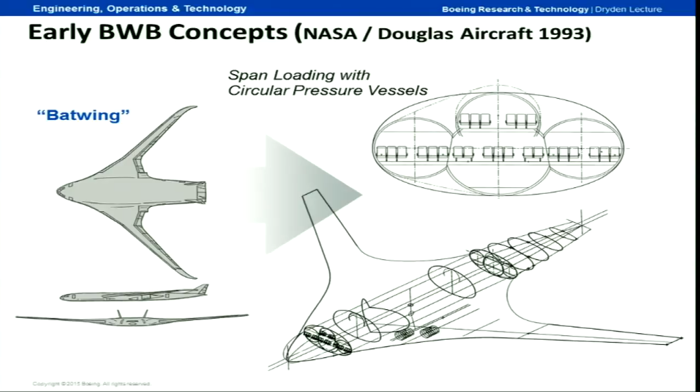So that was bad idea number one. So we moved on. Next slide please. And this is a cartoon that dates way back. We have the configuration of a typical double-deck subsonic transport. And the early concept of the BWB, where you see the one on the left has got the circular sections that'll take the loads very nicely.

The one on the right has, in essence, a flat-sided pressure vessel. And in that case, you have to take the loads in bending. Every flight, you go to the ultimate load, the design load. It also shows that fuselages don't carry lift real well. You see the dimple. The blue is lift, and the red is weight or mass. And you want those equal. And so a fuselage doesn't carry that load very well.

The other thing on the blended wing, notice that the weight is distributed uniformly across most of the span. Those two big spikes outboard of the center body, we call it the armpit of the wing, but there's a lot of fuel volume there and it enables the BWB to be a good tanker. And notice also that we carry the load all the way out to the tip and up the winglet.

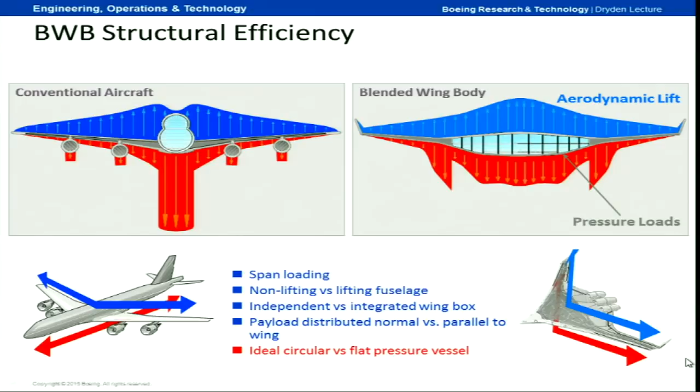The other thing about this figure is, on a conventional airplane, you've got two big things at 90 degrees to one another, and you've got to pass all the loads through those. Whereas on a blended wing, you're lined up. So it's a very simple structure. And it's just a big wing, in essence. And this has enabled a lot of the performance gains that we've been able to show.

Okay, now this is 2001, and this airplane was an early, well, at the time we thought it was the latest thing, but we worked real hard on this one. The 450 stands for 450 passengers, and we did a lot of analysis on design of it and the structure. So we chose it to use for the X-48.

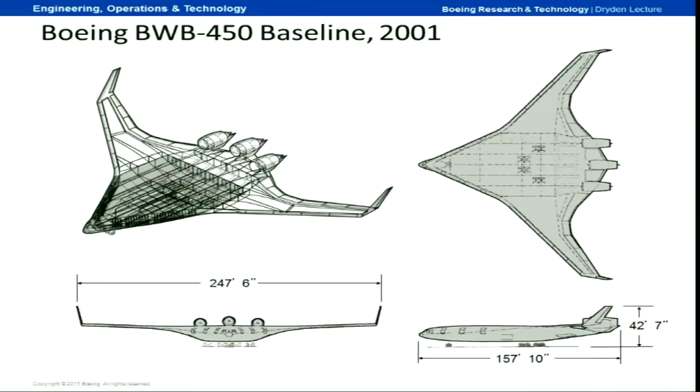Now I'll go to the next slide. Oh, got to compare with the other guy's airplane. There is an A380 and a BWB of the same passenger capacity. I suggest painting Goodyear on the side of the A380.

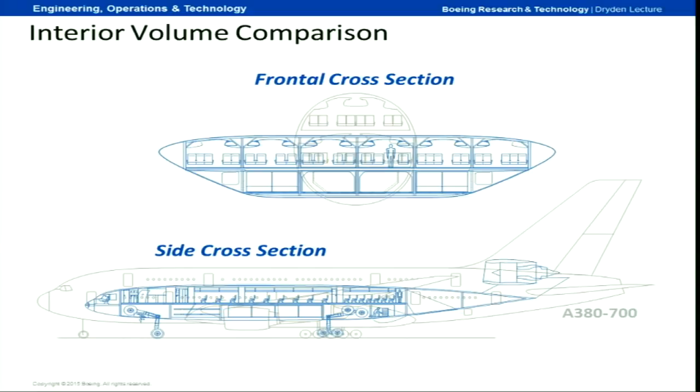Next slide. So what are the real challenges? First of all, a BWB is a nonlinear airplane design. By nonlinear, you poke on it anywhere and stuff changes everywhere, it seems. A tube and wing airplane, which I use in my airplane design classes at both MIT and UCI, is simple. The fuselage has one design parameter, its diameter. The wing has two, sweep and aspect ratio.

And then somebody like Norm Princen puts a big tail on it. So I'll move down to the next thing, which is robust flight mechanics of a tailless airplane. There are a lot of tailless airplanes around, but still, we wanted it to fly just as well as a C-17 or an A330 or whatever.

Okay, and those airplanes have some funny traits. Tailless airplanes, often if they stall, they'll depart in a pitch tumble, either direction. And you probably don't want to schedule meal service then.

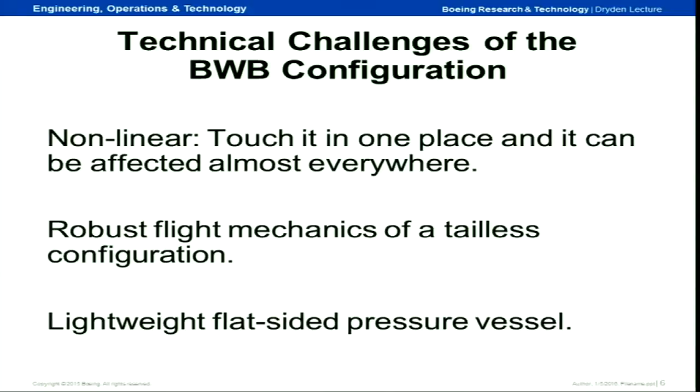Next. And here we have, hey, the B-2 exists. They don't stall the B-2. It stops way short of CL max. And, well, you don't have to make money with a B-2, so you can carry around the extra wing for margin, and it's not that big a deal.

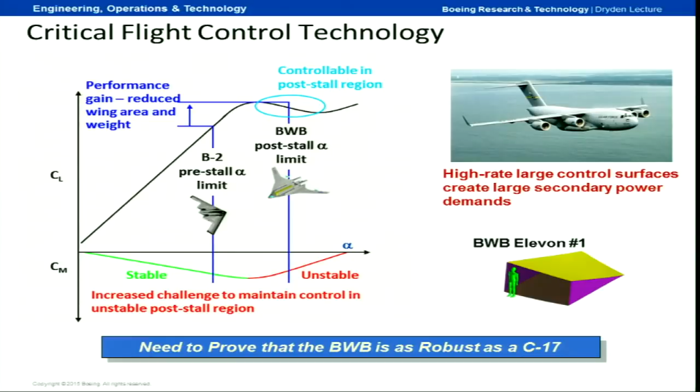But we wanted the BWB to be able to sail over the top of CL max there and still act like a normal airplane. The other thing that goes on, you see in the lower right, one of the inboard elevons—they're the size of your bedroom. And with the case of a tailless airplane, the bandwidth of the control surfaces is pretty high, 80 degrees a second. So you're waving a bedroom floor at that rate. That's a challenge.

All right, the figure on the left is in the NASA spin tunnel. Note that the airflow in this tunnel is vertical, and they throw the model out a window, literally, and see if it spins or not. The XB-35 spun. That's a BWB on the right, and it spun. Uh-oh.

And I was talking with the late Duane McRuer and Irv Ashkenas—you flight mechanicers have probably heard of them. Duane said that the inertias were wrong on the models, and that's why they spun, or pitch tumbled, or both. And what about the inertias? What are the two sources of a force on an airplane? Aerodynamics and inertia.

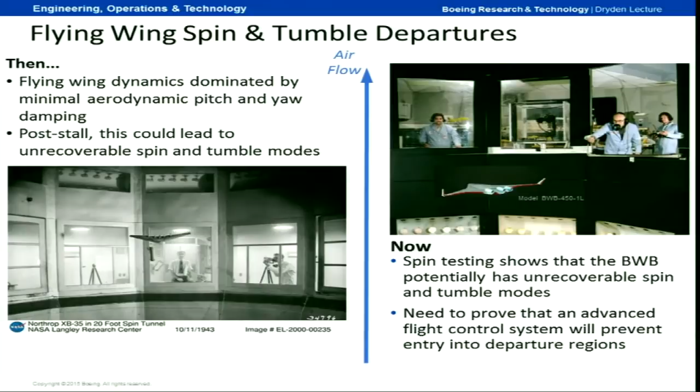And when we were doing an 8.5% scale model, the X-48, it turns out the inertia scales with the fifth power of the length scale. So now if you say that, to build this—there's the airplane, 21-foot span, 500 pounds, but it's still a big airplane. But to meet the inertias of the full-size one, we almost had to build the outer wings out of Kleenex. So it was a real challenge to get the inertias close, to have a dynamically scaled airplane.

And the other thing is, the entire airplane was fabricated at Cranfield Aerospace in the UK, and did a lot of commuting on the 5:30 British Airways flight to London. But they did an exceptional job of building the airplane—built two of them.

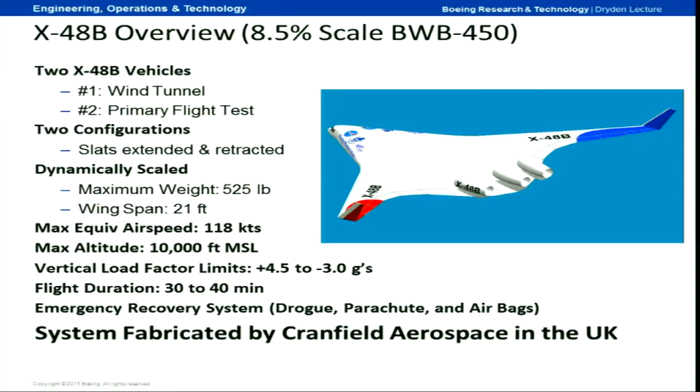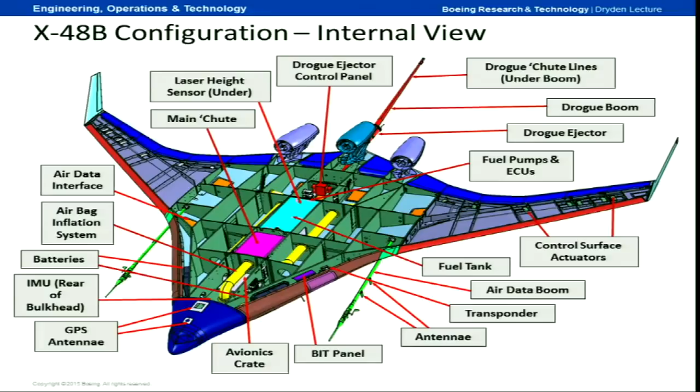Next slide. Another feature with working with NASA—and I'll say it probably more than once—this project was 50-50, Boeing and NASA, totally. Technically we each paid our own way, in essence, but NASA was right in there solving the problems alongside of ourselves.

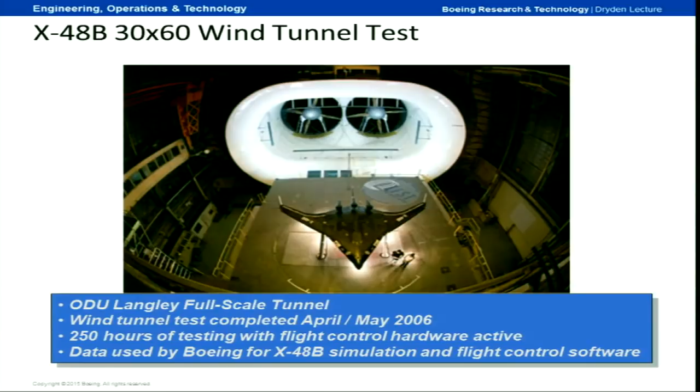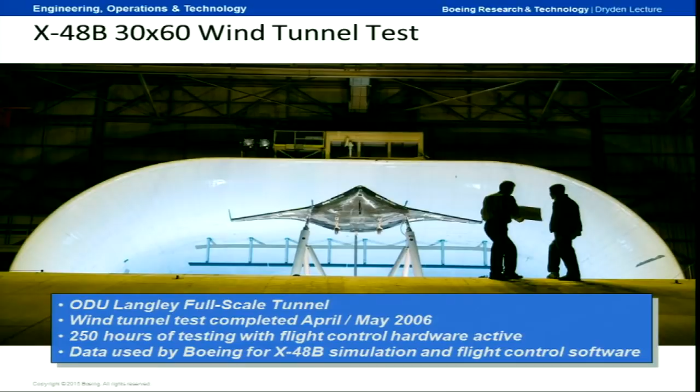Here we are in the 30 by 60 tunnel. That's the full airplane, the X-48. And we were able to go in there and measure stability derivatives in hinge moments, which CFD isn't able to do—right, John? And also calibrate the air data system. To be able to go in a wind tunnel with, in essence, your full-scale airplane was special. There are 250 hours, and we knew everything we needed to know about the airplane.

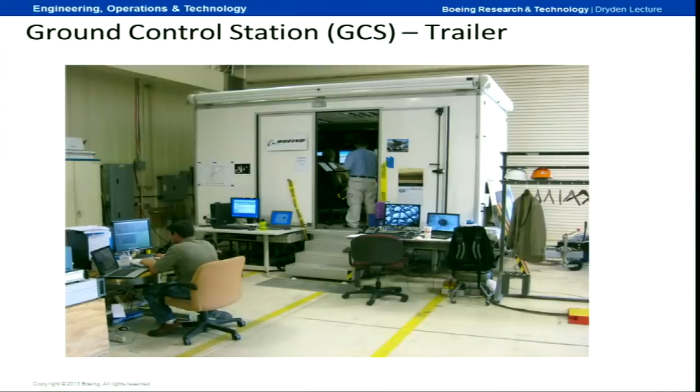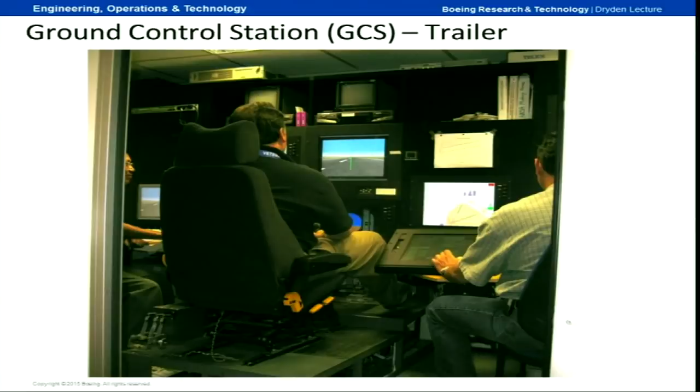$3,500 a piece. Well, it isn't free. It is if you're going out to buy jet engines.

Notice those probes on the front - those are air data probes. They're just pitot-static and alpha and beta vanes.

Out the back is a boom, and that's so if we do abort the flight, we've got a drogue chute, and we don't want it to entangle. So the drogue chute comes out of the back, and the airplane - we had a complex system, I won't go into it, to try and save the airplane on abort. When that drogue chute comes out, the airplane winds up going straight down at 90 knots.

And then we had a parachute that comes out of the top and so on. We never had to do that. But this is 2007.

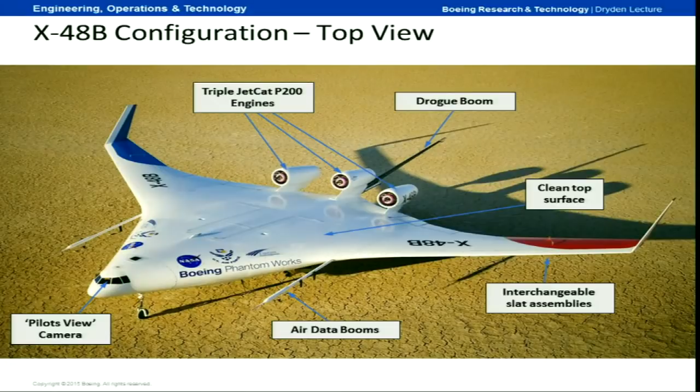The picture without the logos was in Time magazine as the second best invention of 2007. Anybody know the first? Nope. So we were second. Oh well, okay, next slide.

Here's the first flight.

Skyway 48, Skyway 48, over, sir. 48 in position, Lake Bed runway 23, request clearance for takeoff. Skyway 48, roger, main base wind calm, cleared for takeoff.

We're in a pickup truck next to it, and Norm Princen is holding the video camera out the window.

This is NASA video now. Skyway 48, airborne.

The practice, I'll do a left turn for area orientation, but the real one will be right. There should be no trouble at all. And for card Lima 6, we are at high key. Skyway 48, practice high key.

Throttle on. T-34 throttle on. Speed and power's coming, chase back. Verify tape mismatch. Yes. Check control. Control is correct. Throttle off. Throttle disengage with the throttle button. Full doublet when able. Doublet in 3, 2, 1, doublet and roll, complete. Doublet when able, doublet in 3, 2.

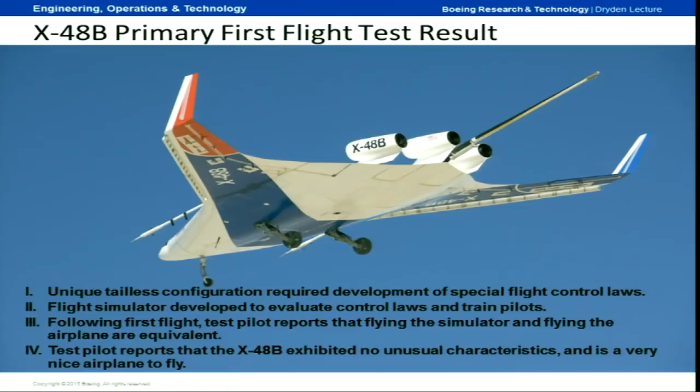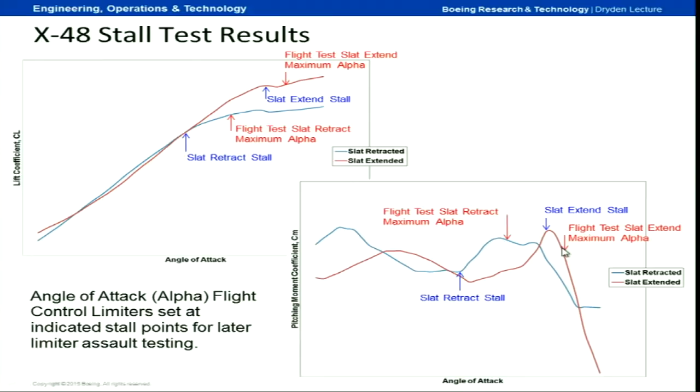But this is how we set the limiter values that you'll get to see exercised. Next.

Okay, these flights, the pilot just slams the rudder.

Recover? And recovering. 17.05 max.

Okay, good point. Let's do 4 Bravo in opposite direction. Okay, slight right turn and then a left rudder. And stable, you're clear, rudder on 3.

Recovering. 17.49 max. There will be a left rudder step. Stabilizing. Bank.

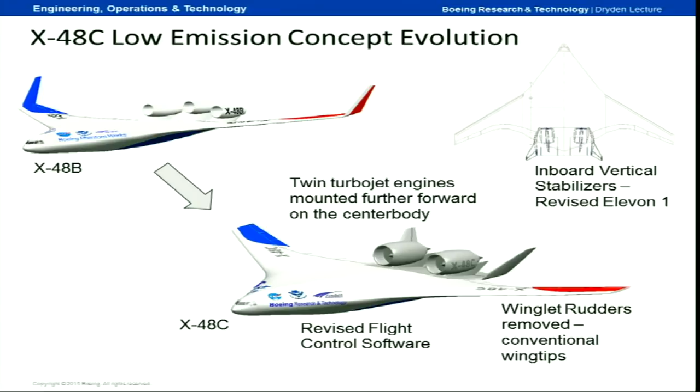Next, we looked at making a quieter airplane. I've been dragged kicking and screaming into this one because I like the verticals on the wingtips. But at any rate, there it is, and it's the direction we're headed now. And we went to 2 bigger engines, or higher thrust engines, and this is called the X-48C. And it's got Norm Princen's signature on it. The tails are bigger. Okay, next.

We tested it also in the 30 by 60 tunnel. And incidentally, this was the last time the 30 by 60 tunnel was used. I threatened to pull a Tiananmen Square thing in front of the bulldozer that tore down the tunnel, and Faye said, please don't. But we went over, again, all the stuff for the X-48C, and then another test using another model in the Langley 12-foot to get a A to B comparison of the rudder effectiveness primarily of the B versus the C. And they were damn close.

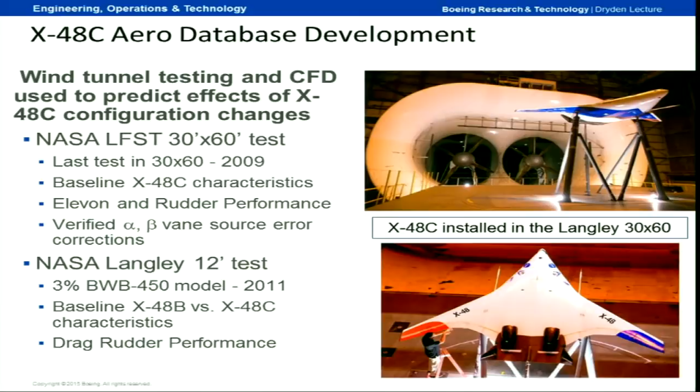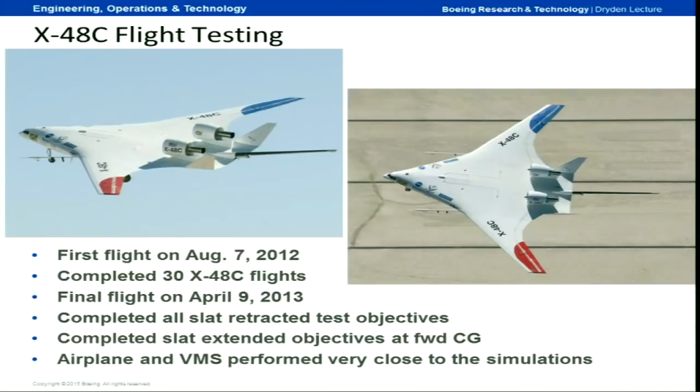Okay, back to the winglet rudders. No. There is the X-48C in flight, and its last flight was on April 9th in 2013. And we got all of the data we wanted out of it. Okay, next. So where were we?

We had a total of 122 flights for the whole project, single string. I think that was a record at Armstrong. And so what's happening now? Well, the X-48C is in the museum at the Air Force Museum at Edwards. And the X-48, the other one is packed up, but they're ready to fly again. I was just talking to Israel Wygnanski at lunch today about some control effectors that we could test on the X-48C. Norman is pretty excited about that. So we haven't given up. Those airplanes are still flyable. Next.

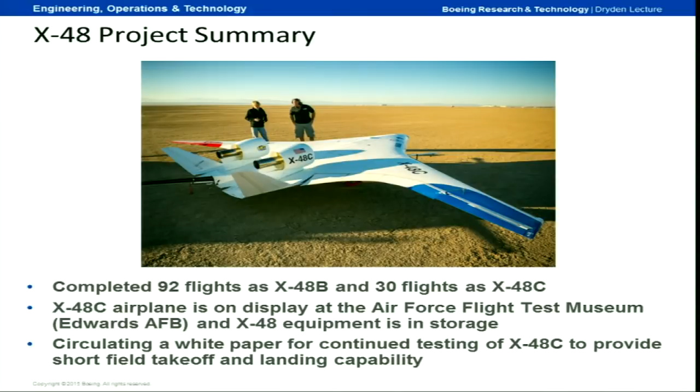This is the other problem. This is the structures problem. And if you look, there's a BWB. Well, again, this is our flat-sided pressure vessel. And normally, the skin of an airplane just takes NX and NY. But if you're pressurizing it, you have NZ load. So we needed a structural concept to do this.

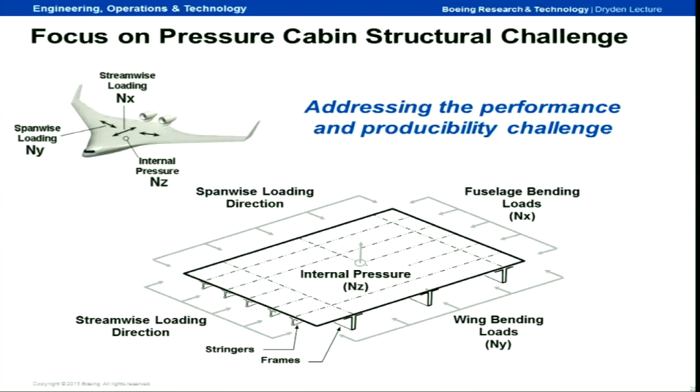Next. There it is. Pultruded rod, stitched, efficient, unitized structure, PRSEUS.

This is the brainchild of Alex Velicki. To me, it's just a tooling concept, but...

It's a dry preform, and it's stitched, and then a bag is thrown over the top of it and resin is drawn in. But when you stitch it, as opposed to pre-preg, where you've got just layers of pre-preg tape, this is way more isotropic. And this is an ingenious way of tooling.

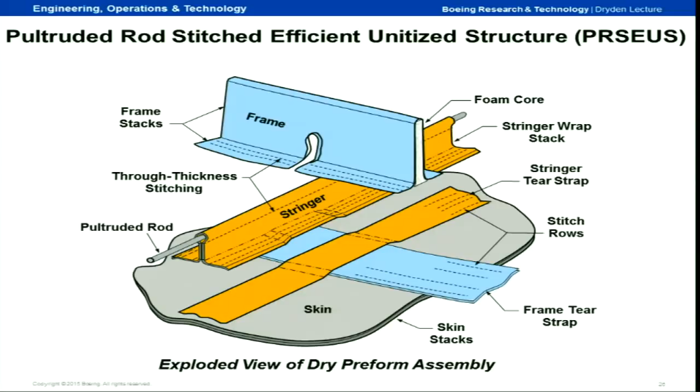And the next slide shows what happens when you do that. That's one piece. There are no rivets, there are no brackets, nothing's bolted together.

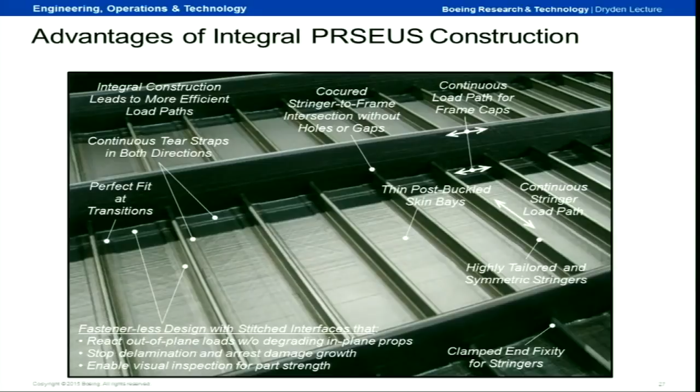It's one monolithic piece. And so we built a center box. Next slide, there it is. We wanted to build a full scale, but the COLTS test facility at Langley would only hold 80% scale. And you see where it comes out of the BWB. And that was an impressive structure. There's some cutaway on that.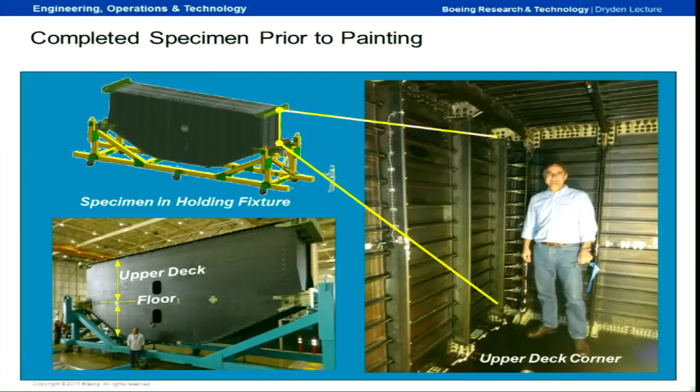So what are we going to do with it? Next. It wouldn't fit in the C-17, so we used the Guppy. And there it is. Not that long ago, the Guppy flew back to Langley, December last year. There it is, departing Long Beach.

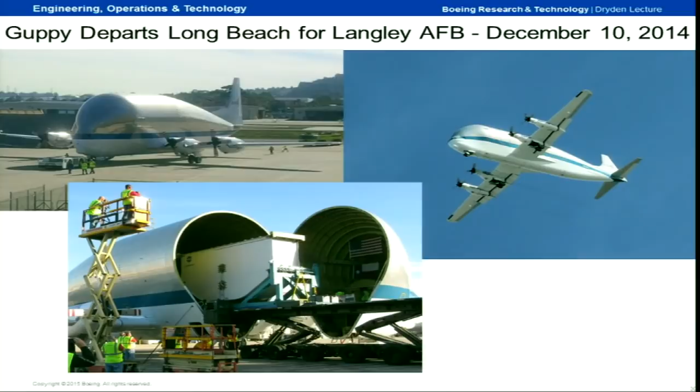This COLTS thing is the meanest thing to torture a structure that you could imagine. Basically, it grabs each end of that center box and loads it with aerodynamic loads, the maximum aerodynamic loads. And in addition, it's pressurized. What we had was the critical design conditions: 2.5 Gs plus 1 pressure. But we tested way beyond that.

I'm sorry, let's go back to that. At the design, those are the design values. It didn't break. And we even went to the ultimate load and didn't break.

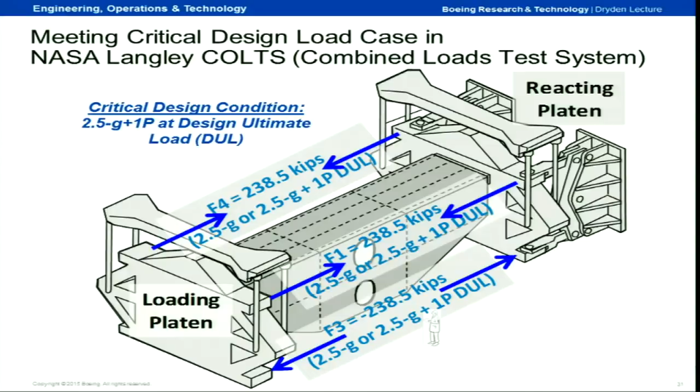So, next slide, we went and hit it with a hammer. And then in the lower right corner, that's a 2-foot long slice, 1 inch wide, trying to hurt the thing. Well, the only thing it wouldn't do was hold pressure.

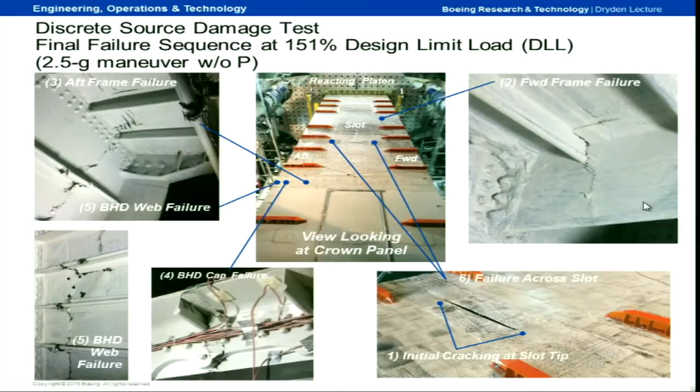But when we loaded it up, the next slide I think has a summary of it. There, we had the 5 load cases where, incidentally, on these 2.5 G things, we put twice the pressure load on it. And those 5 top test cases, the thing was happy.

Enter the Sawzall, and we cut frames, still in the test fixture. A requirement, FAA, FAR, is that with damaged structure you get to 70% of design limit load. With the broken structure, it went to 151% of design limit load. And it acted like metal, because with metal structures we still use the 2-bay crack rule and all that. The thing acted like metal.

Here's the big answer: minimum gauge. The skin on that thing is 52 thousandths, that's a little less than a 16th of an inch. That's the skin, and we can use that everywhere. So not only did it not break and exceed the numbers, it's light.

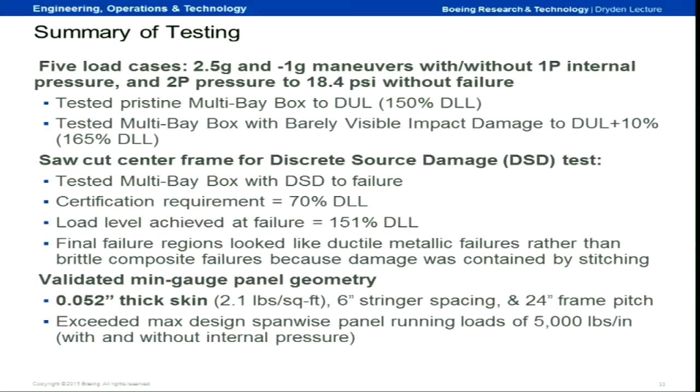So, next slide. Another thing going on that was just presented here, the ERA thing. This is a different airplane, the more modern BWB. There are several talks on it going on now. It was tested with flow-through nacelles, ejector-powered nacelles, and turbine power simulators, TPSs. We were looking at the effects on the control surface of the exhaust, and you can see the white plume there. Again, we tried to make it not work. It'd take too long to go through all the things, but it was a smashing success.

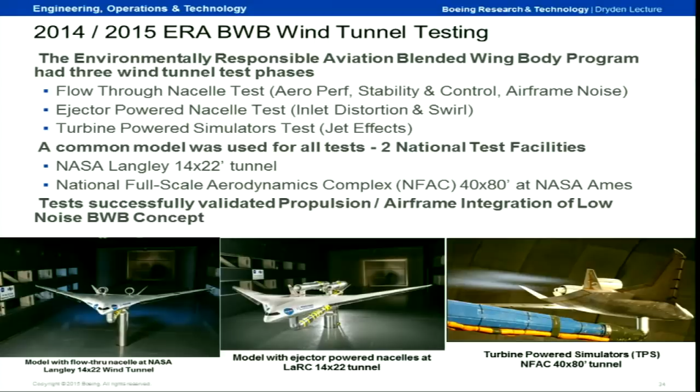So, where are we? The X-48 stuff said we've got a robust airplane. Alex's structure works. We can build the airplane and have a pressurized center body. And it exceeded, as I say, all the limits.

And finally, what's the next step? Well, I showed you the Guppy there. We had to use the Guppy because that thing wouldn't fit in a C-17. Going over the ramp, you couldn't put that box in. But with a BWB, if we want to have airdrop, we have a clamshell door in the back. We worked with the Air Force on this. So you can airdrop from the airplane, and you can trim it. Normally, if you just put the lower ramp down, the airplane would pitch down. But we raise the upper ramp too, and it gives us more clearance for the cargo. We did spend quite a bit of time on the design of that and weighing it, and that works.

In the meantime, we want to do a flight demonstrator, and you've probably heard that. We built a pick-your-size array of BWB demonstrator candidates, and these aren't just cartoons. We sized them and weighed them, and any of them could be real airplanes. So let's see, the next slide is controversial.

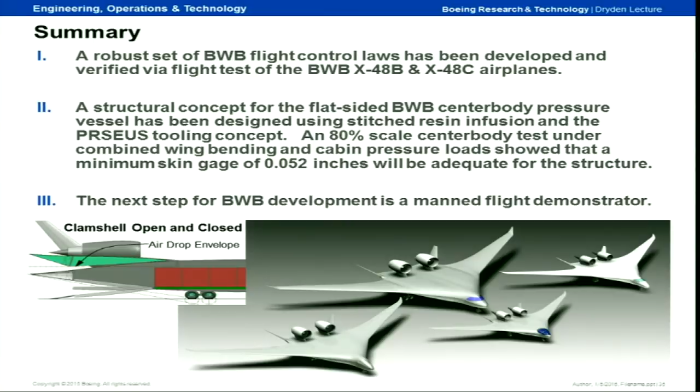You acknowledge, and you make about everybody isotropically unhappy - why is he there and why aren't I, or why'd you put me on there? At any rate, we took a shot.

Three key people on that thing are Norman Princen, Alex Velicki, and Fay Collier. Fay fell on his sword several times to keep this thing going. The airplanes were built by Cranfield Aerospace, and we could fill pages with acknowledgments, but that's a try at it.

Next slide. That's it.